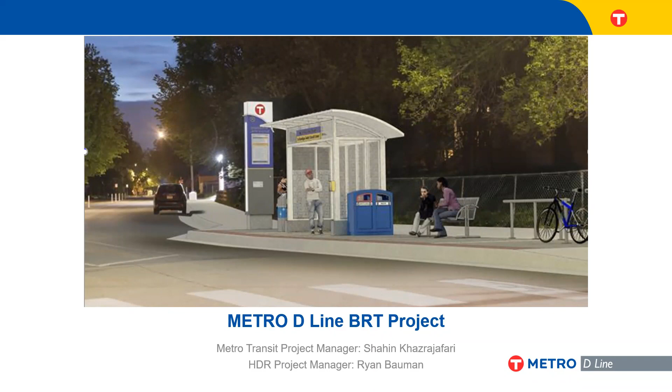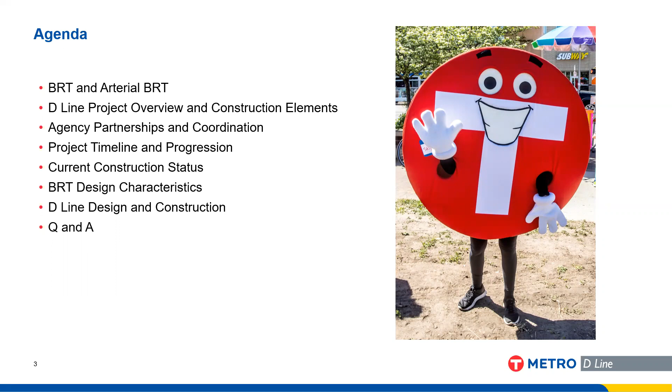I'll just dive right in with that background that Courtney gave. What I'll cover today, and what the two of us will cover, we'll talk about generally what BRT and arterial BRT are, talk about the D-line, an overview of the project and also construction. I'll cover a bit the coordination and partnerships we have had and continue to have with other agencies on this project. Then we'll get into the timeline and current construction status, and talk a little about BRT design characteristics and considerations, and how that played in with the D-line design and construction. And we'll open it up to your questions.

So bus rapid transit, BRT for short, is an enhanced, more efficient, higher quality bus service. You pay at the station and you board at either door on the bus. There are higher elevation platforms, lower bus floors, set up to allow for easier and quicker boarding and deboarding. There are additional amenities at the stations, which I'll get into later. There's reduced wait time at traffic lights. Typically BRT stations are placed on the far side of the intersection, past the traffic light, and the lights are often equipped with transit signal priority in order to let that green light stay on just long enough for the bus to pass so it doesn't get stuck behind the red light.

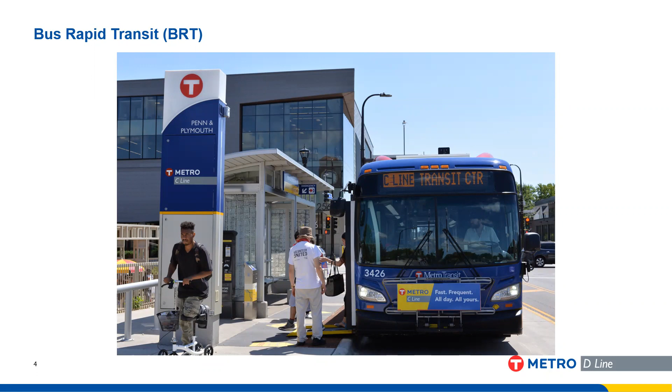There are more frequent trips with BRT. Metro Transit BRT typically operates about every 10 minutes most of the day. And there are fewer stops per mile, roughly a stop every half mile or so. So in a sense, BRT you could think of as light rail on wheels, traveling through busy city streets.

Now with arterial BRT, Metro Transit conducted an arterial transit corridors study between 2011 and 2013. During this study, it looked at urban corridors with high ridership bus routes that connect major destinations for the possibility of implementing BRT service. As a result of this study, the conclusion was that BRT service in these corridors could help improve travel speed, increase reliability, enhance the overall ride experience, and create faster connections for our customers.

So what came out of that study was what we saw with the design and construction of the A line in 2016, which goes from the 46th station generally through Ford Parkway and up along Snelling Avenue. And then in 2019, the C line, which was constructed and travels through downtown Minneapolis and generally through Penn Avenue, all the way to Brooklyn Center Transit Center.

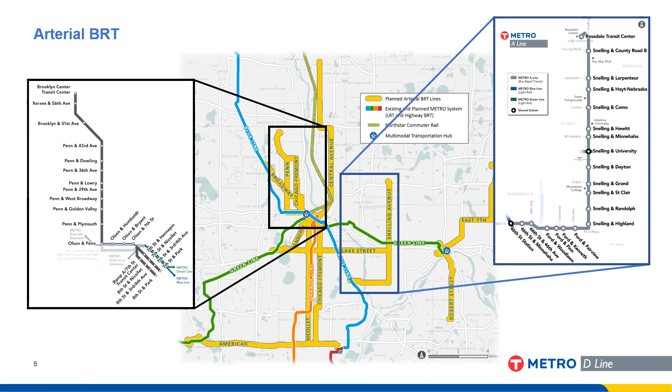In addition, we've got our shelters, and unlike our standard bus shelters, these shelters also include additional amenities such as heating, light, additional seating, and security cameras, as well as an emergency telephone, which is connected to our Metro Transit Police Department.

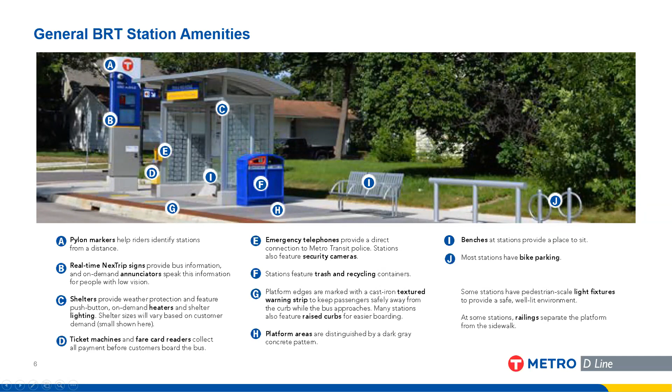In addition, with the signature look and aesthetics, we've got colored concrete at our platforms, and we also have a cast iron truncated dome strip that goes along the platform to warn our customers from the curb. This, in general, is what you would see at every BRT station within the metropolitan area.

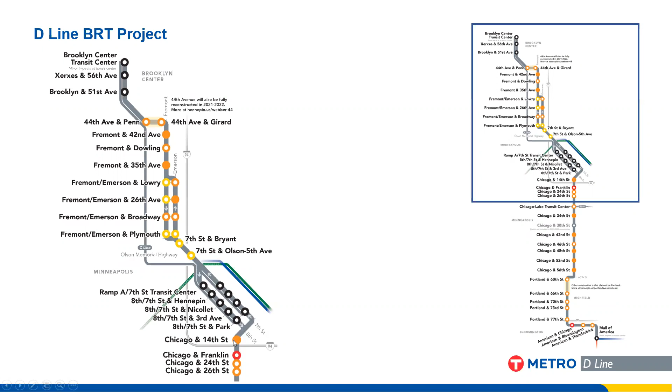So with the D-Line BRT, what you see here is the corridor through which it will travel. Going from north to south, it starts at Brooklyn Center Transit Center, traveling generally through Fremont and Emerson, through downtown Minneapolis to Chicago Avenue, and moving south through Chicago Avenue to Portland Avenue, American Boulevard, and finally to Mall of America.

I will get into what these different colors are later. However, these circles are where we currently have our D-Line BRT stations located, with the black and white circles being stations shared between the C Line and the D Line. So they're currently operational with the C Line utilizing them, and the D Line will travel through there as well, most of them being in downtown Minneapolis.

This is an 18-mile line corridor. It travels through 4 different cities: Brooklyn Center, Minneapolis, Richfield, and Bloomington.

Currently, Route 5 operates in this corridor and serves our customers. Route 5 is the highest ridership route in the region, even during the pandemic. This is a corridor where 1 in 4 households do not own a vehicle, and they rely on public transit to get to work, school, or any other activities.

The D-Line is a roughly $75 million BRT project that will substantially replace the existing Route 5, and it will provide a more reliable and more equitable service to our customers in this corridor. It will operate at just about every 10 minutes, and it's approximately 20% faster than the existing Route 5. If you want to do the math, Route 5 currently from Mall of America all the way to Brooklyn Center Transit Center takes somewhere around an hour and a half, and with the D-Line BRT, that's estimated to be brought down to just slightly over an hour.

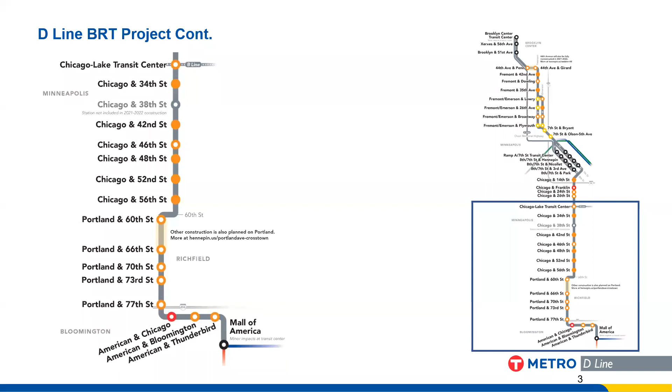We have our bumped out station platforms, another element of the project where our buses will stop in lane as opposed to pulling in, allowing for more efficient service. These platforms include shelter, pylon, and other amenities. We also have bus pads constructed within the city of Minneapolis at the city's request, where our buses would be stopping, to minimize wear and tear on the road with concrete bus pads in place. We also have new ADA pedestrian ramps and often signals as well.

There's also street pavement replacement. In many cases where we have a bus pad, we extend that work out in the street all the way to where our platform footprint is. There are also utilities that may be impacted as a result of our project that may need to be relocated, so we make sure to replace areas in city or street pavements where we have impacts. Because the station is bumped out, it's tapered back in, and sometimes this taper causes the need for driveway reconstruction.

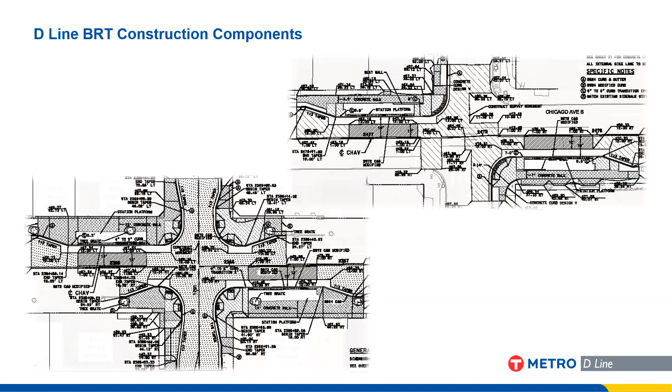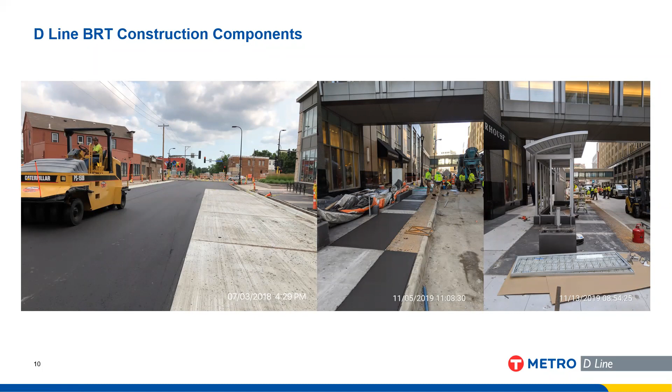Another item we include is often trying to have the sidewalk and pedestrian access pass behind our platform area so we don't have conflict of use—that's typically what you will see. However, in some areas, as we coordinate with our partners, due to lack of space we end up having more of a shared path in front of the shelter, with the shelter placed further back.

We also have different sizes of shelters that we use. Here you see a small shelter, and depending on ridership demand at different stations, we may use larger shelters as well.

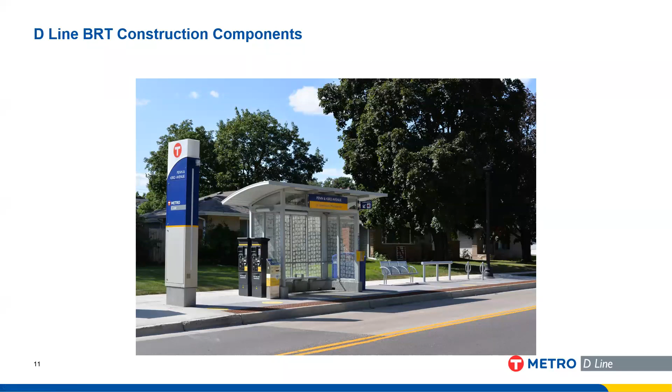In addition to those permanent station platforms, with our construction we also have what we call temporary stations. In this case, we have one temporary station that will be constructed with the D line, at Portland and 77th. As we went through design, it became clear that in coordination with MnDOT, the MnDOT 494 expansion project in this area was going to extend into our D-Line BRT platform footprint.

One thing we've been mindful of and trying to incorporate into our design is to eliminate construction rework, and avoid putting in something only to have new construction torn out by another agency, or vice versa. In this case, this is a photo of a temporary station we have at Olson and Humboldt.

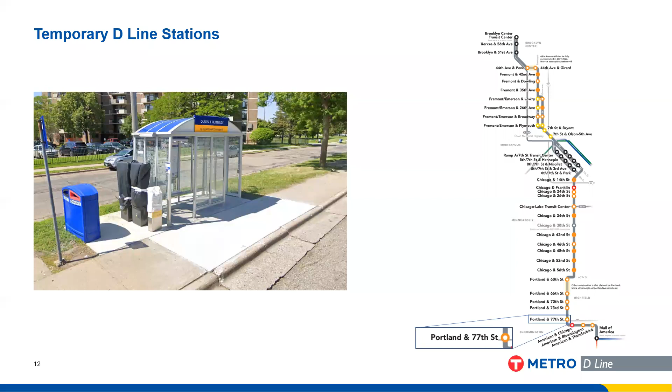We may pour a concrete pad, but then we have a standard shelter that's provided, which will include heat and light. There's an LED sign that provides real-time transit information, trash and recycling collection, fare collection equipment and fare card validators. So it provides the same level and quality of service to our customers and ensures continuity of service. But it's also a temporary measure, less intrusive than permanent construction in this area, meant to be replaced with a permanent platform eventually, which we'll coordinate with MnDOT to have as part of their project.

I've touched on coordination quite a bit. As I mentioned, with our project going through 4 different cities, on county roads, and adjacent to projects with other agencies, it's been critical to communicate often and make sure we're talking with the various entities whose backyards we may be operating in. Pretty much the entire D line is constructed in public right of way, which adds to the need for that communication. So we've been closely coordinating with partners: City of Minneapolis, Richfield, Bloomington, Hennepin County, and the Department of Transportation.

There are locally requested scopes from Minneapolis, Hennepin County, and the City of Bloomington that are part of this project, as a result of this constant communication. We've made sure to include the design requirements that each of these cities and agencies may have as part of our project. We continue to coordinate with them today through construction to make sure necessary permits and traffic control measures are communicated, and that our contractor and agency partners are all on the same page.

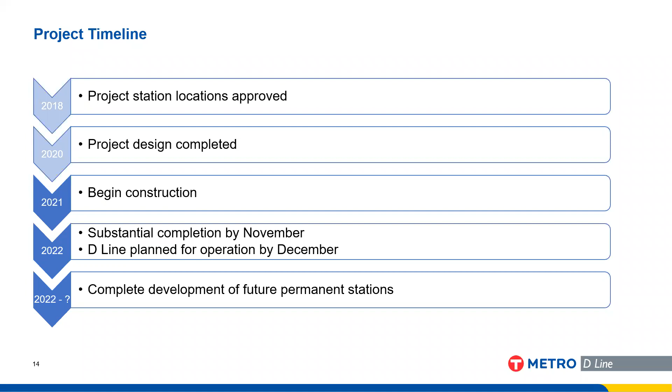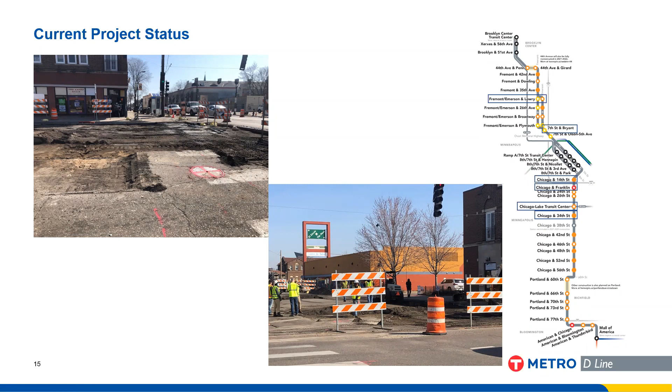Getting into construction status: as of April 5th, when the contractor officially broke ground, the photos you see were taken that date at Chicago and Franklin, showing they had already started removing street pavement, with traffic barricades put up. Today they've gone through most of the removals and are ready to begin curb and gutter construction. Right now our contractor is active at Fremont, Emerson, and Lowry; 7th and Bryant; Fremont and Plymouth; Chicago and 14th; Chicago and Franklin; Chicago and Lake Street; and Chicago and 34th Street. We've been having construction progress meetings weekly to understand where they'll be and what work they'll be performing.

I mentioned traffic barricades, and with a project of this magnitude on such busy roads, there will be significant detours and temporary intersection closures. As you can see from these colored nodes along the corridor, there are several intersections throughout Minneapolis that will be closed entirely for one month, with up to three months of lane restrictions, and others with lane restrictions for two to six months to give the contractor enough space to perform the construction.

So there will be detours in place, in fact they're already in place for both vehicles and transit buses. Our Route 5 bus, which would typically run down through this corridor, is currently detouring from downtown Minneapolis through to 42nd Street, through Portland and Park Avenue. That's the current detour in place.

There's been a lot of public engagement and outreach to make sure our customers and the community are aware of these changes. There are also traffic detours implemented along this area, and they shift as the contractor moves up and down the corridor. However, it's also our goal to continue to maintain access, both pedestrian and vehicle, for all local residents and businesses in the area.

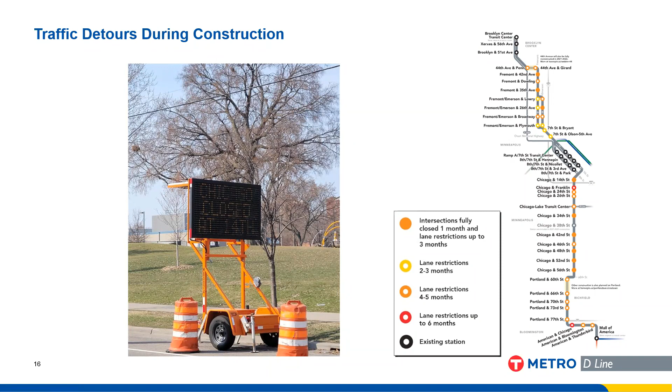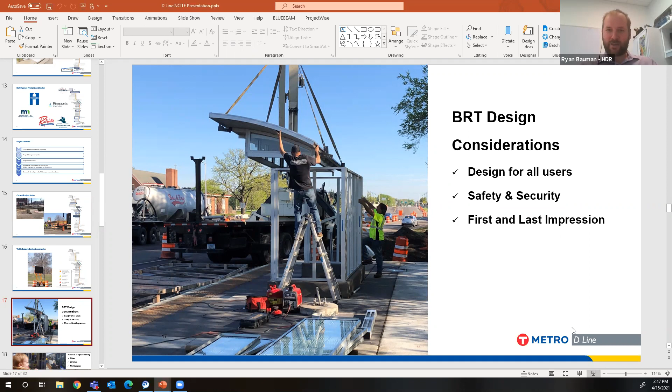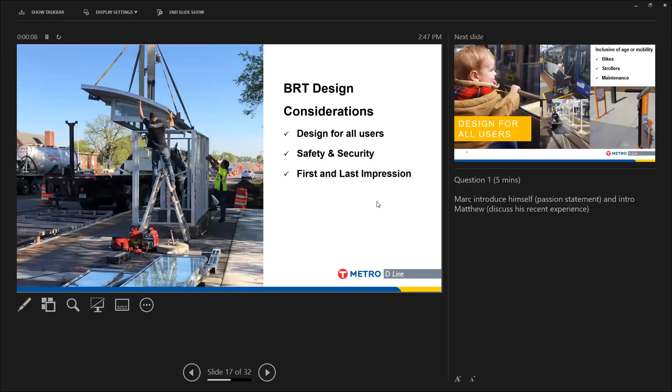Let me see, I've got to hand this back. I do apologize, I'm fluent in Teams and WebEx, but not as fluent with Zoom. It looks like Ryan's already taking control. Thank you, Ryan, I appreciate it. Can you hear me, Shaheen? Yes, we can. You see a screen, but probably not here - be my eyes if it goes full screen. Uh-oh, you're probably seeing the wrong view of this. I think I can see your... there, there we go. Looking good? All right, well thanks Shaheen. So first, I got to say, if anyone has any issues, lives in this area and has issues with the traffic control, just give Mike Martinez a call and blame him. But wow, I didn't know if you had control to unmute or not here. Hi Mike.

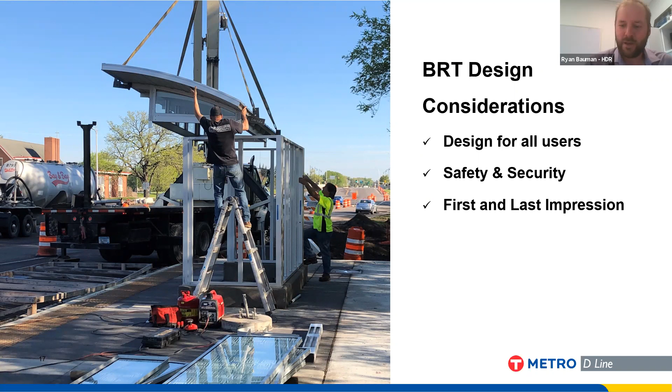As I was going through this, I don't want to bore you, but I want to hit on a few of the nuances that BRT design has over a typical roadway, some unique characteristics. I started my career actually in traffic - I see Nick Erpling's on over at RLK from a long time ago - but now I'm pretty biased towards transit, so I don't like to admit I was ever a traffic engineer, with all due respect.

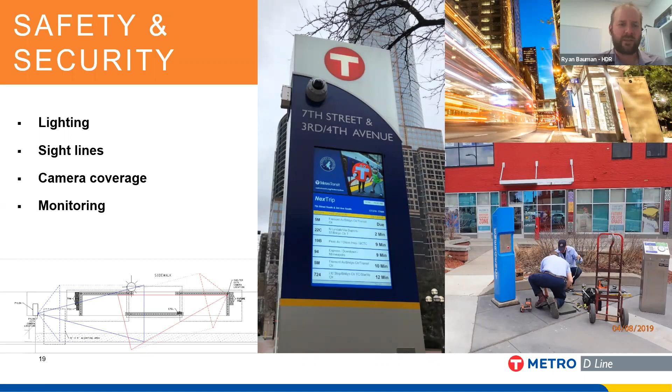And then close consideration towards maintenance - it snows here, and what do you do with that? So really, when it comes to laying out a lot of those amenities and station elements, those are things to think about differently as people are going to be at these spaces. And then again, safety and security.

So there's a whole FTA process on safety and security that goes into threats and vulnerabilities of this infrastructure, but it really comes back to some key elements that's common among any project, which is lighting that focuses on that boarding area or where ticket money exchanges are happening. Being a thoughtful neighbor and not having light pollution onto someone's front window.

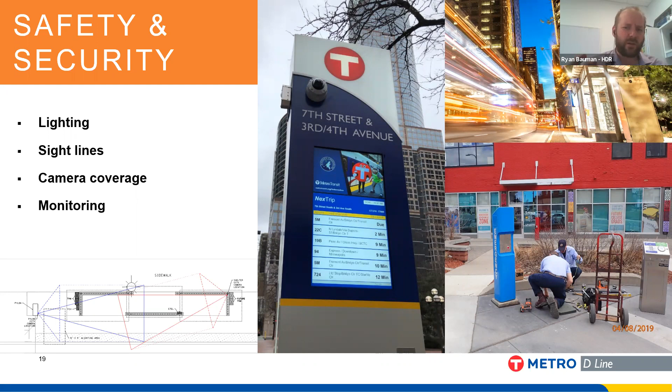Adequate sight lines, CPTED principles, and then filtering that into the camera coverage. As we have cameras out on these platforms, they provide a sense of security to people. So it's critical that there's someone on the end of that emergency telephone to answer and be able to see back to that platform, and definitely on these more vulnerable areas, adjacent to the roadway, or again, where fare collection is occurring.

And then what's really neat about transit and BRT projects is that it's really the first and last interaction with riders. And how do we use this as an element to help not only serve the frequent riders, but also build those first-time riders. So that branding that's out in front of your business and out in front of your home, that's the D-line. That's the bus you take and the bus that you're going to get home from. It makes that ease of use, and then really that connectivity - not just in the real-time sign perspective.

And I had to put this technology shot in the middle here just for the traffic controller type of nerds on the call. That's all the intelligent infrastructure that's inside of these real-time information cabinets that's relaying when the next bus is coming, and gives that sense of equity back to the community, of bringing these premium amenities to all these communities. The best bang for your buck in transit is really BRT.

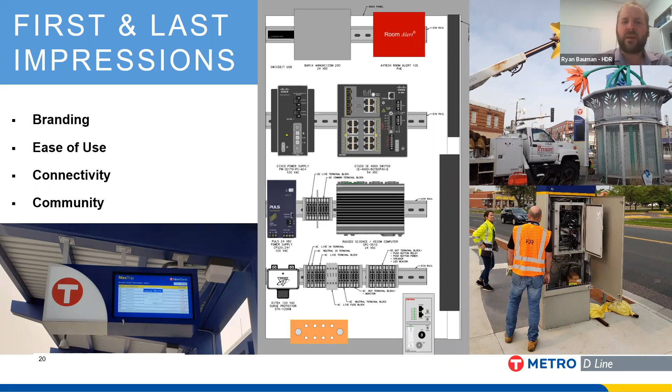And then I mentioned community. Well, that first and last impression into the community is usually referred to as that first and last mile connections. At the station platforms themselves, we have bike racks and connectivity, but it goes well beyond just a bike rack. It's how do the existing bike lanes interact with the BRT system, as you see on one of our renderings here from 42nd Street. It carries through the intersection, but also that pedestrian realm.

If you're riding a bus, your trip doesn't start and stop at the bus stop. It starts and stops at your place of work, your business, the grocery store, the hospital. And so connecting that public realm into the private realm is really critical.

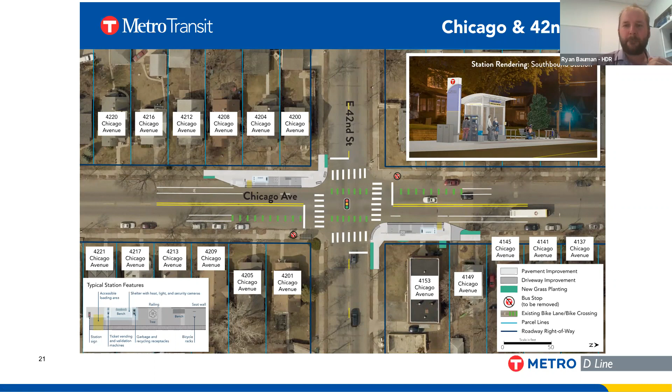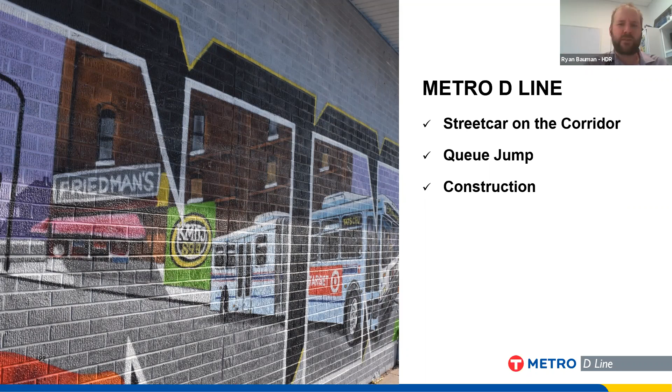And now kind of bringing it from that high level, 30,000 foot look, and diving into a couple of the unique pieces to D-Line itself. And I like starting with history. I don't know if through the past year and the pandemic, if anyone else has fallen asleep to PBS documentaries, but I definitely have had my share. So hit you with a few history facts here.

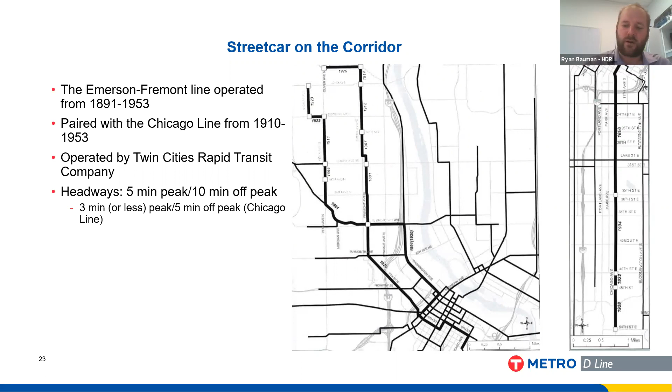This old corridor was originally the Emerson Fremont line that operated from 1891 till 1953. That connected to the Chicago Avenue line. And what's really neat about this is back then they had headways at 3-minute peak periods and even 5-minute off peak. I mean, that's how this whole community was built up among a whole historic streetcar route.

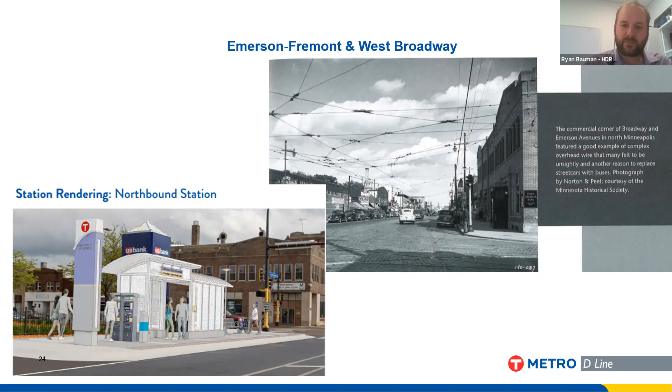Now to give you a little bit of traffic flavor, I'm going to talk about the queue jump at Chicago and Lake. This queue jump really started with a Minneapolis pilot project to paint a dedicated lane near that Lake Street Transit Center. The issue with that, though, is as D-Line started through design, that D-Line would no longer serve the Chicago Lake Street Transit Center.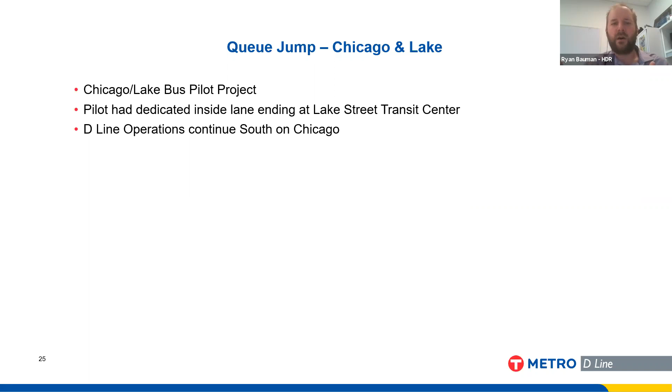So as we look at kind of where that dedicated lane pilot is, it's a center running southbound lane that was striped out, and then you notice it dives into a left turn pocket into Lake Street Transit Center. That's that Midtown area, but doesn't extend all the way to Lake Street.

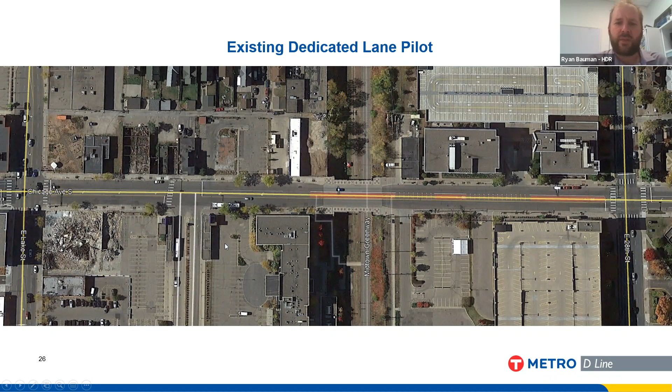So as our team put together thoughts, we asked a lot of questions to the partner agencies to collaborate amongst - Metro Transit, Minneapolis, and Hennepin County. How can we build off the momentum of this pilot? And then what is that right balance of passenger throughput that meets the needs of all these competing street use needs for each partner agency? And how could this segment really complement the investment that's being made in the D line?

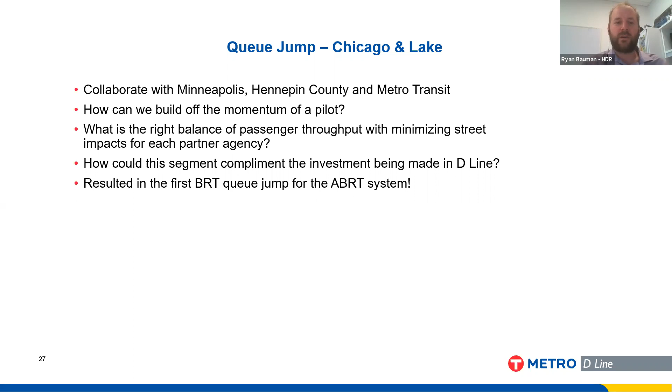And the cool story is that it's resulted in the first BRT queue jump for the whole system that Shaheen was speaking about earlier. I should say it's not out there yet, but it's under construction.

As you see in our rendering, we moved the dedicated lanes to the outside lane and provided our station design. The bus no longer turns into the transit center, but provides a faster connection so we can stay in line on Chicago Avenue, and provide thoughtful pedestrian crossings back to the transit center. Then a queue jump, as you see towards the left of the screen here, is a mixed right turn lane and queue jump across Lake Street to allow the bus to maneuver back into through traffic to head south.

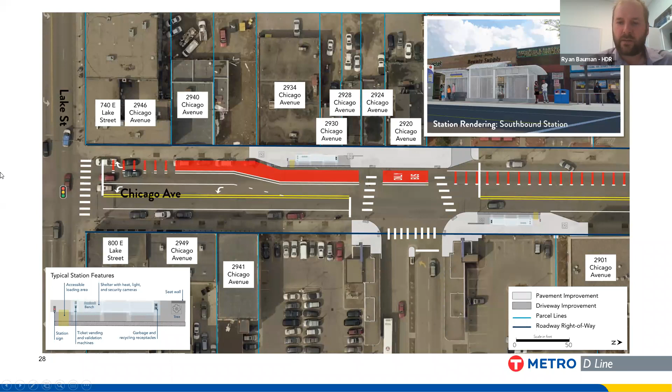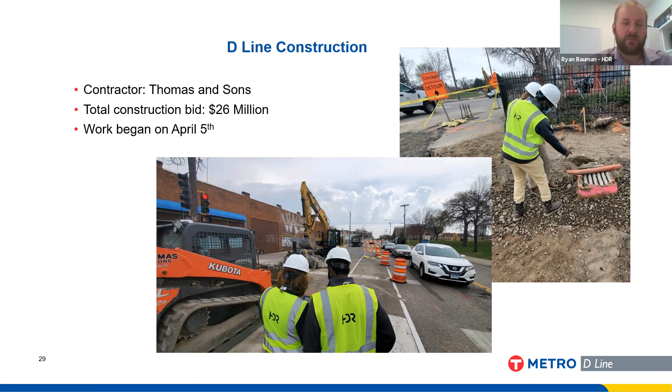As Shaheen touched on, we're under construction as of April 5th. Blame Mike for any issues you may have, but it's really cool. Our contractors, Thomas and Sons, came in under budget with a $26 million bid, and we're really looking forward to seeing this through to December.

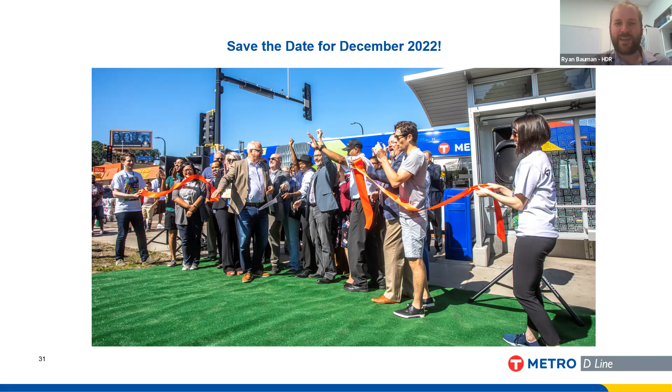As I mentioned, 2022 is going to be a fun time. It's going to be an exciting time to see this project open, all the project partners' hard work pay off, and look out for some celebration dates. Bundle up, but we're Minnesotans, we can handle it, right? Appreciate everyone's time today.